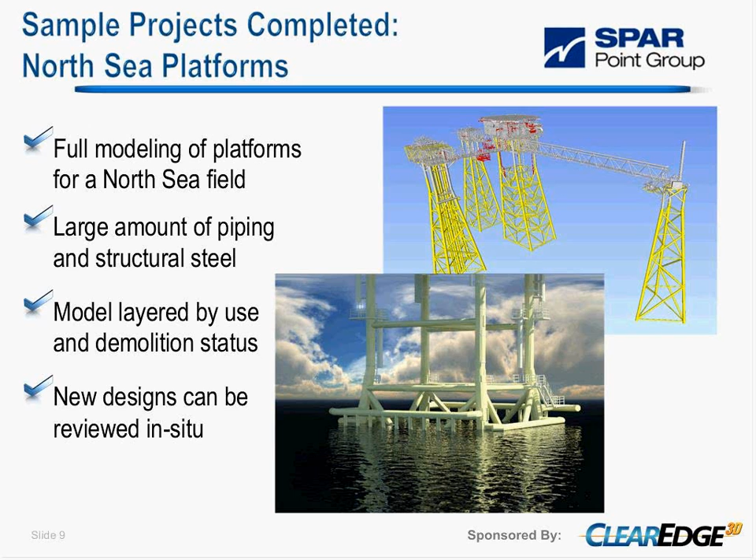The platforms have their own particular operation. They're very congested internal areas, so space is absolutely at a premium, and new piping and equipment must be fitted in right the first time, otherwise the cost gets very high. So with space at a premium, accurate models are essential for these redesign projects.

Modifications as part of the cycle mean that we pass the model around so engineers have accurate data to code on in the project. We do a precise tie-in for the piping engineers to connect new spools and equipment, so they get a fit first time once it gets to site.

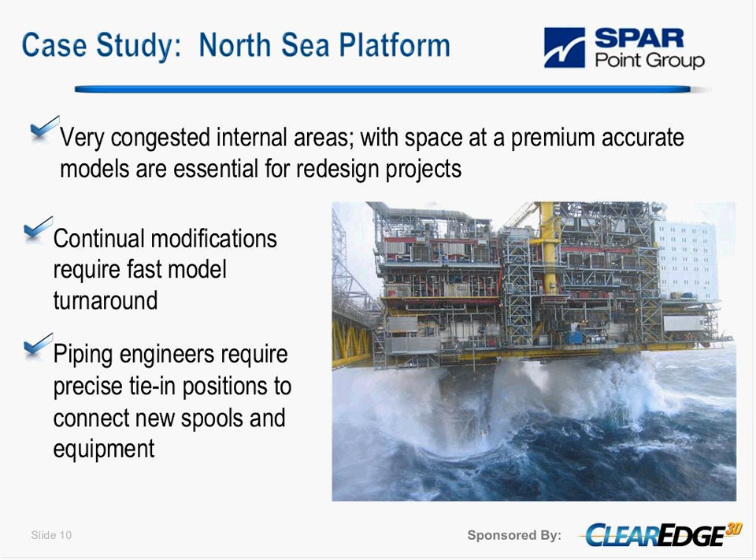Working in these areas for site capture, we found that swivel or spherical targets allow for efficient targeting. In a lot of rooms we have access platforms which need scans taken from them, so flat paper targets don't give sufficient versatility for angling in these conditions.

The surveys we work with typically achieve 60 to 70% target coverage, and then with the LFM register package we complete the target network using bundle adjustment. So bundle adjustment completes the target network, giving us full coverage without needing the full survey, which would add more time than is available in these conditions.

One of the challenges we have is the weather. As you can see in the picture, it can be inclement out in the North Sea. So in the external areas, in a strong prevailing wind, this can actually stop scanning due to the force of the wind on the unit, as the magnetic drives don't have enough torque to turn the scanner in these conditions.

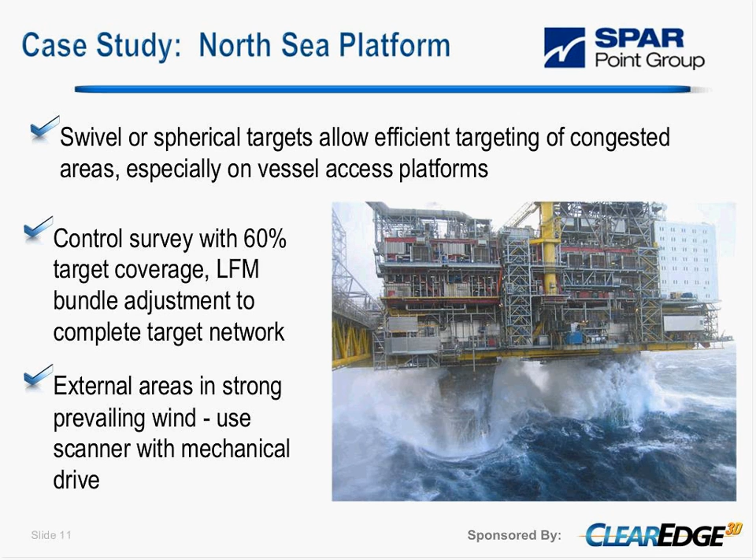The case study I'd like to look at is for the ClearEdge 4 software. A plant room on a North Sea platform required piping to be extracted for a review and then redesign. The piping connection positions - the bolted flange positions and connecting faces - were required for the tie-in to new designs.

Pipe fittings were to be based on the ANSI standard. Modelling this with older methods, using manual pipe extraction and fitting, would take 60 hours; we got this down to just 15 hours using ClearEdge 4 - a 75% reduction.

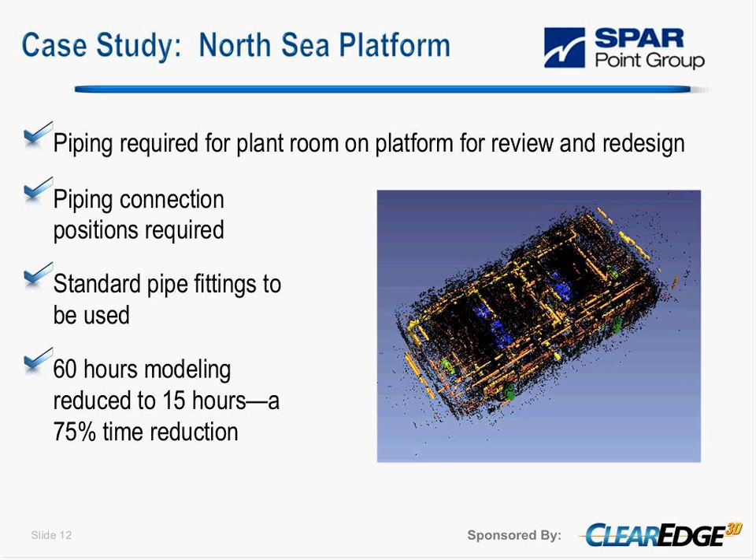To complete the particular area took 20 scans with the 5010. This covered the floor level plus 2 access platforms for upper valves and instruments. You see the image there, the point cloud with the various scan positions - this is out of Edgewise Plant itself, and green indicates each scan position.

Registration took 1.5 hours while offshore, so we complete the registration there. If there are any missed areas, we can rescan on the platform, so we don't have another costly trip out if anything is missed.

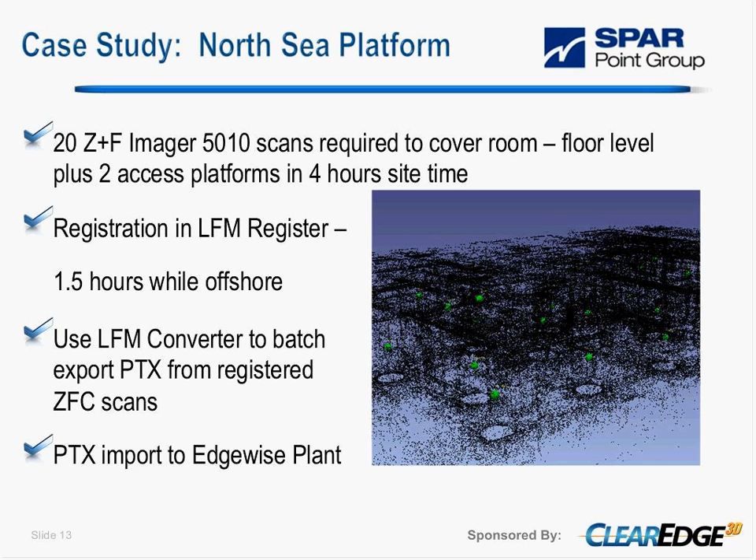After registration was completed, we used LFM Converter to batch export PTX of the registered scans, which could then be brought into Edgewise Plant. We don't have direct ZFC import, so we did have to do this additional step, but as it's a batch process it didn't add significantly to the time for a person working here.

Once the data was brought into Edgewise, the cylinders were extracted within 1 hour. We got approximately 85% of the required cylinders out within that time.

After the extraction, we needed to spend time cleaning, QA, and adding the pipe fittings - standard elbows, flanges, and valves that are now within the software itself, which Kevin will show later on. So that took the first 14 hours.

We then used COE output to AutoCAD, which allowed us to use a solid model import to SmartPlant 3D as a 3D reference. This allowed the engineers to view and snap to existing connection points to continue with their work.

So the image that you see there is the extracted and connected pipes, using the auto-connect feature to join up pipes within the scene.

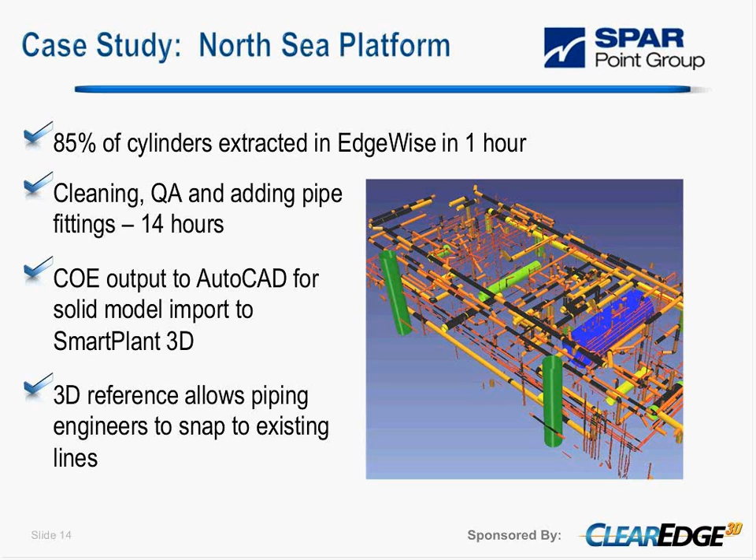We found the automatic cylinder extraction really frees up the user's time for the placement of components and other model detailing. By removing that overhead of bringing out the cylinders, you get more time to do the smart stuff, like positioning components correctly and layering the model.

We can lay this out in ClearEdge itself, so we export to DGN with the piping separated by layer, pre-ordered into different water systems and process systems to turn on and off as required. A SmartSheet with the listing for different pipe diameters allows rapid QA and approval. And see the standardized fitted cylinders using the ASME standard, with several others already in there.

In QA, you've got a very good fit to the point cloud data. Flange detail also allows engineers to take the correct connection position directly out of the model, so with face flanges you have appropriately dimensioned raised face, ring joint, and other flange types.

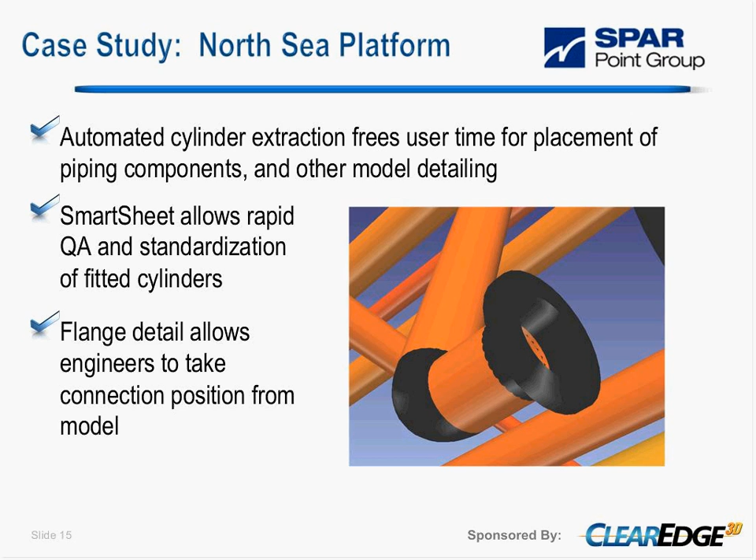A tool that we found very useful was the removal of points around the lines. So we work through the project, and once a line has been made, QA'd, and verified to be as you need it, you can remove those points from the data set, then clean up the scene so you can see exactly what remains and what has to be done.

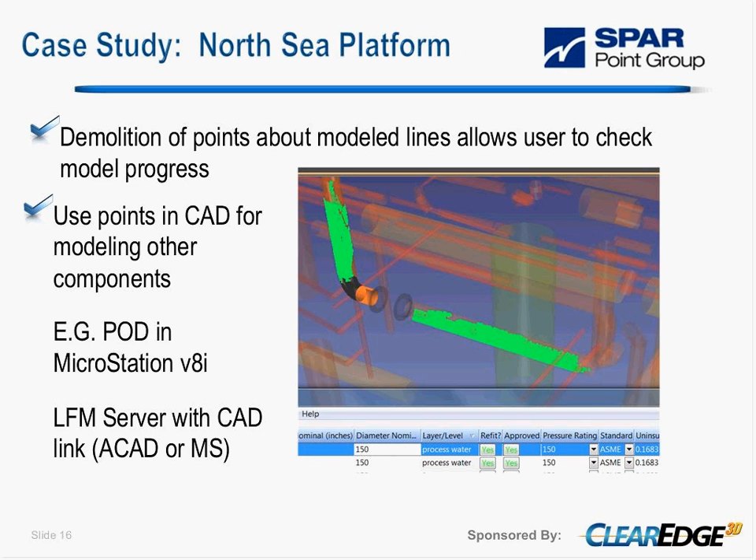Robert, hold on one second, because there are a couple of quick questions that's probably easier to answer now. There's that quick question there: was AutoCAD used to convert the pipes into solid models before you imported into SmartPlant 3D?

The reason we bring it in that way is because you have the layer reference within SmartPlant, so you can turn on and off the separate layers. The reason you go through AutoCAD is that it will display as a solid model. If you bring in a DGN, it displays wireframe only, so it's very unclear.

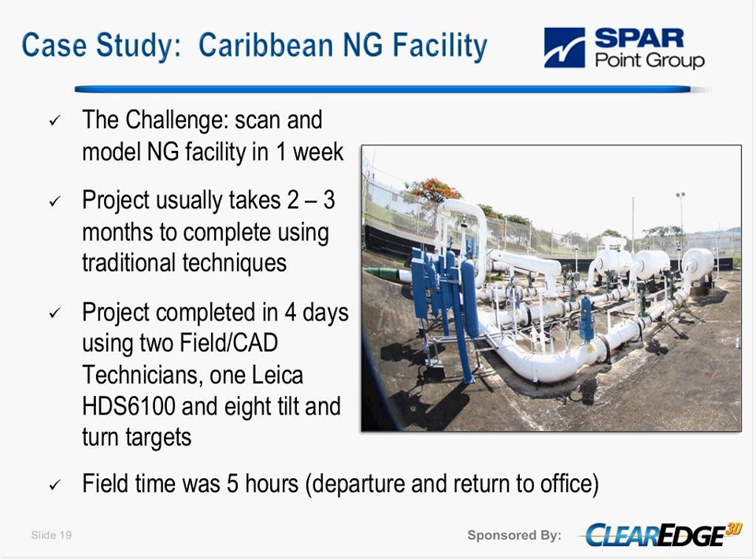The field time was pretty much 5 hours, from the time we left our office to the time we returned to our office that day.

When we got to that site, or any site you're scanning, you need to do a walkthrough to determine exactly where you'd like to position your scan locations. Based on this position, you then stand and place your targets so you can get a field of view of all your targets.

The station took pretty much 26 scans, which included scans outside of the facility because we wanted a topography of the site as well, a site layout.

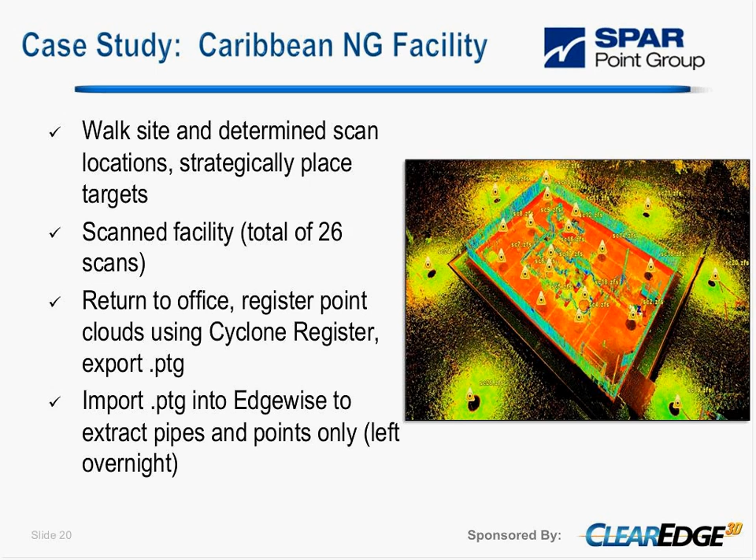After we completed the scanning, we returned to the office where we registered our point data using the Cyclone Register suite, exported the unified point cloud using PTG export, which could be imported directly into Edgewise, where the pipe extraction was done and left overnight to complete.

The next morning we got to the office, and that phase of work was now completed. 95% of all our piping was automatically extracted by the Edgewise plant software.

This really considerably saved us time, because it would have taken another 2 or 3 days of cyclone modeling to obtain that same data in terms of the cylinders. We completed the extraction process, feeding that data directly into Cyclone, where we build our elbows, flanges, valves, and fittings.

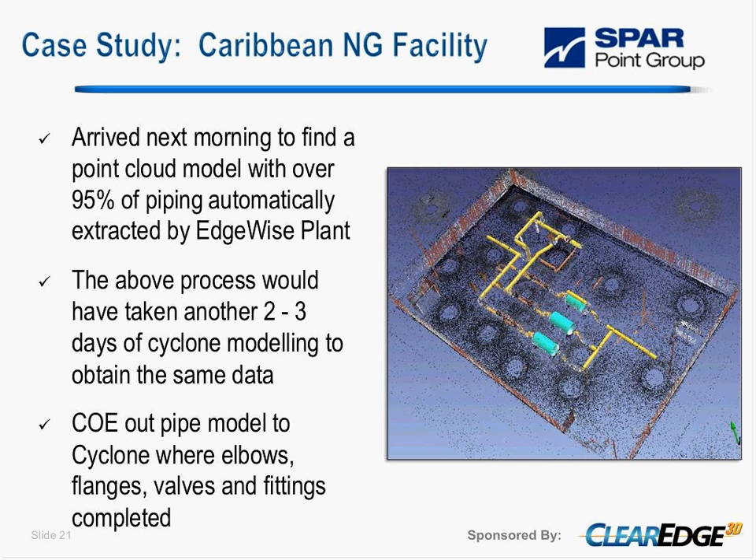This was using version 3.2. If we were using version 4.0, this would have saved even more time, because we could have completed all our elbows, flanges, and fittings directly in the Edgewise product, without even having to go into the Cyclone product for modeling.

After going into Cyclone and completing those fittings, the next step was to export a COE of that model into AutoCAD, where CADWorks is also running on that same platform, using the center lines of those models to develop our CADWorks intelligent view. The facility took less than 3 days.

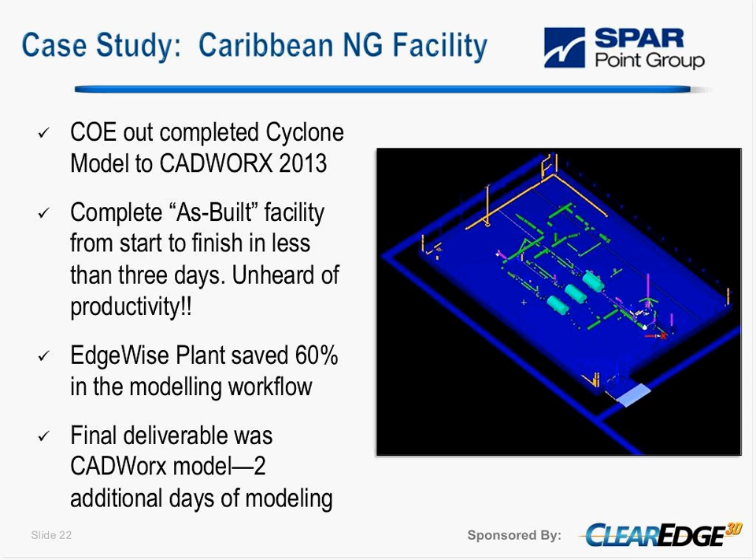In terms of productivity in our country, EdgeWise Plant really saved us a lot of time, over 60% in the modeling workflow, with just 2 additional days doing the CAD modeling to complete that model.

Now a bit on the challenges we usually face when modeling these facilities, and some tips and techniques for these problems. One major issue is trying to target your facility without over-targeting it.

You might also end up with heavily congested piping, especially small bore piping. How do you position your scanner to get data without too many occluded points? Also, some facilities, especially gas facilities, have a lot of Denso tape on the flanges, which is a problem especially when doing dimensional control.

The lagging on some plants is really bad, not put on properly, which creates challenges for us. Also, twisted piping is definitely a bad thing to deal with.

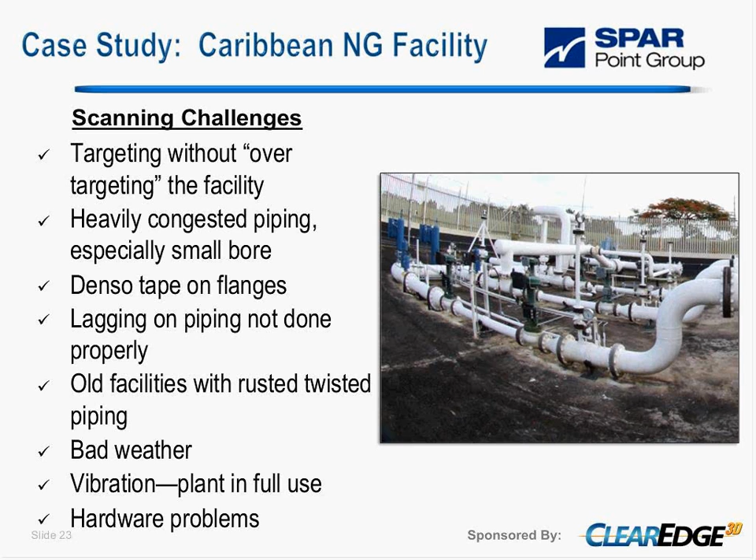These plants are all outdoors and not covered, so weather plays a big part. When it rains, and it rains a lot here in the Caribbean, in Trinidad, that holds us back. Vibration is also a problem, especially on offshore platforms with grating and structure, where the scan sometimes shuts down because of high vibration. And then there's the scanner itself acting up and holding you back from a job.

One way we try to combat some of these problems is by using tilt and turn targets, as mentioned in the previous slide. They give you a really good point of view. Using a few of them, you can see them from many different locations, as opposed to flat targets, which are restricted in how they can be seen.

Generally in the field, I always tell people: the more data you can get in terms of acquisition, the less time you're going to spend, because you'll have enough data to utilize for your model. There's a benefit here in the sense that with EdgeWise, you need that much data to be able to extract your pipe, so this can be a strong point. Without EdgeWise, you definitely want to get as much data as possible so you can model things correctly.

Experience plays a big part in determining where to set up your scan locations, mainly to see the plant properly. When looking at a location, you're using two points of reference: your eyes, and the center of the laser, so you're not seeing exactly what the laser scanner sees. After doing a number of scans, you get a feel for what you can and cannot pick up with the laser scanner. This determines how many locations you need and where to position your scanner to get as much data as possible.

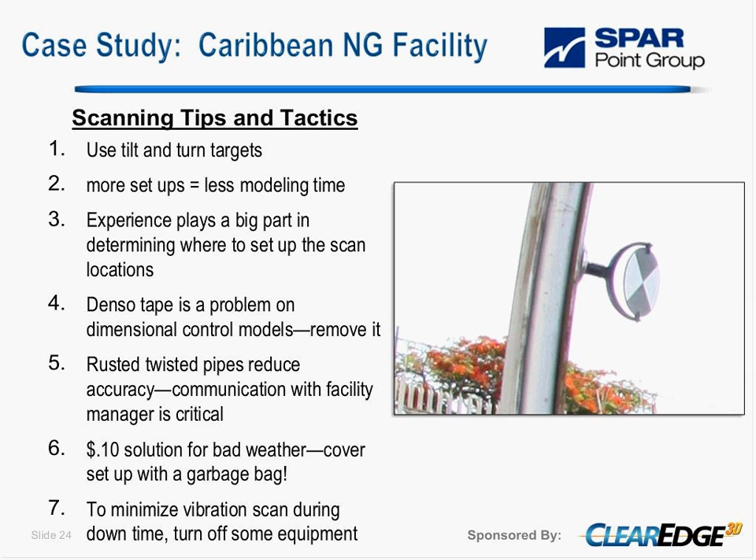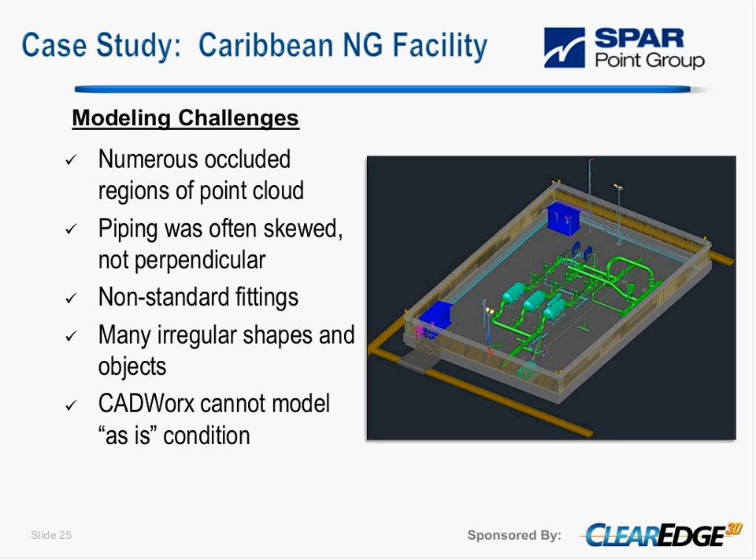The extraction and auto-complete algorithm is generally used from where you don't have enough points. The software doesn't require that many points to be able to generate a cylinder, especially in those tight locations where you might not be able to get all of the piping that you think you require.

So understand what the plant is requiring. If it's not dimensional control, then we don't have to worry too much about the exact location of every single fitting in that plant. From the get-go, it's just a 3D model for our materials or for the guys in the field to work with, and that's not such a big issue.

So we can deal with taped connections, rough-fit piping, bent piping, and all of that stuff. The thing about EdgeWise Plant is you can put in a lot of non-standard fittings there, which greatly improves and enhances your productivity time compared to the older plant.

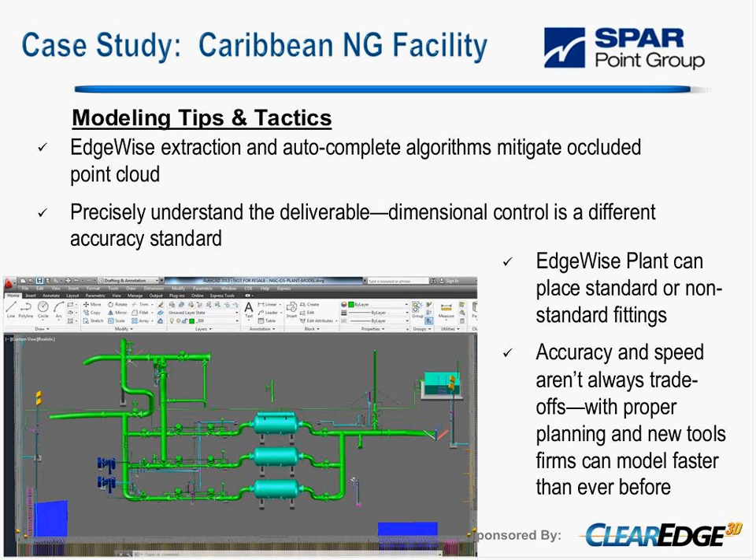Because these new tools now model much faster, we don't have to sacrifice accuracy for speed - it's so much better and much quicker. It reduces a lot in terms of getting to a deliverable much quicker for the plant, and much more accurate as well. So with that, I'll hand you over to Kevin.

What is Denso tape? It's a very sticky tape that is used on those flanges. Some people use it when putting it in - if you have very small leaks, it prevents that from escaping into the atmosphere. It's a sticky, difficult tape to work with.

And the other question I think would be good is, you talked about the amount of time you needed for the scanning - I think it was 4 hours in the field, was it? What quality or resolution were you scanning at to get that time?

We have high resolution. A scan typically takes us 3 minutes on that high resolution to look at.

Okay, excellent. All right, why don't you take it away, Kevin, because I think a lot of the technical questions are going to be answered by you. Thanks, Sam.

The first couple of versions of Edgewise Plant were great time-saving tools. They did really well, automatically extracting pipes and elbows, but they were fairly limited in scope of what they could model. So 4.0 is a full end-to-end solution for creating pipe models. In this version, we filled really all the remaining gaps in the workflow process, and we think we did it with very fast, efficient and accurate tools that ought to make pipe modeling a whole lot more pleasant going forward. It should be a lot more cost efficient than with some of the older technology.

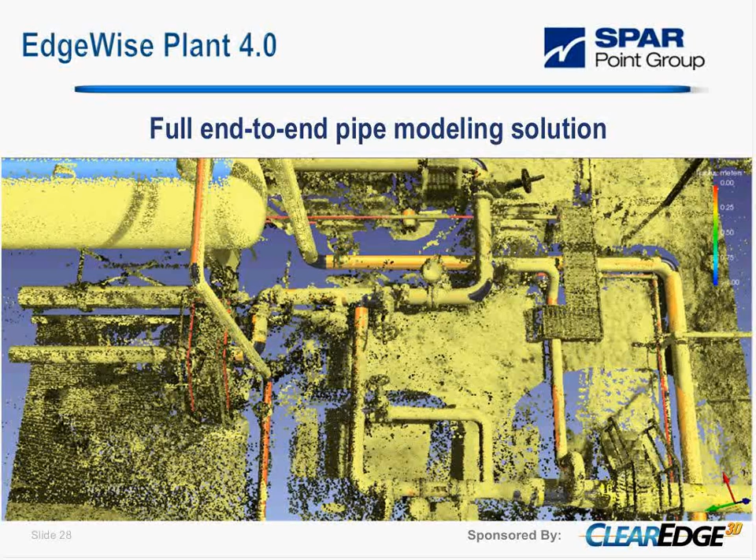This next slide shows some of the major new features that we added to Edgewise Plant 4.0.

The first and most obvious thing is we rewrote our old point cloud visualization engine. If you had used an older version, it was really meant to just process through a bunch of data and create pipes automatically. But with these new tools, we really needed a good quality point cloud visualization engine. So the current version, we've tested it with up to 10 billion points. That's just the largest data set we have, but in theory its only limitation is the size of your hard drive, and it works really quite well.

We've substantially improved the automated piping, so it pulls even more pipe than older versions. We have really cool new QA tools, and we think we've got the QA process about as good as possible now. You can QA 1,000 pipes in an hour if you know what to look for. It's a really quick and very thorough way to make sure all your pipes are perfect.

We've got driven valves, flanges, reducers, eccentric, concentric. We've built out a set of specs, and all the components are based on those specs, and that's fully editable. So if you're working with the spec, you can clearly build your own spec and use that to create components. We have a demolition tool, which a lot of people have expressed a lot of interest in and requested. What it essentially does is find all the points associated with a pipe run and remove them from the point cloud, so it's as if the pipe never existed.

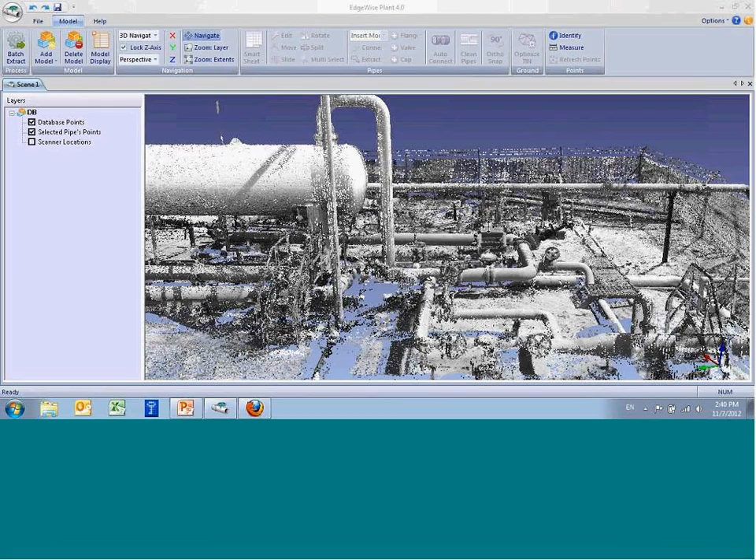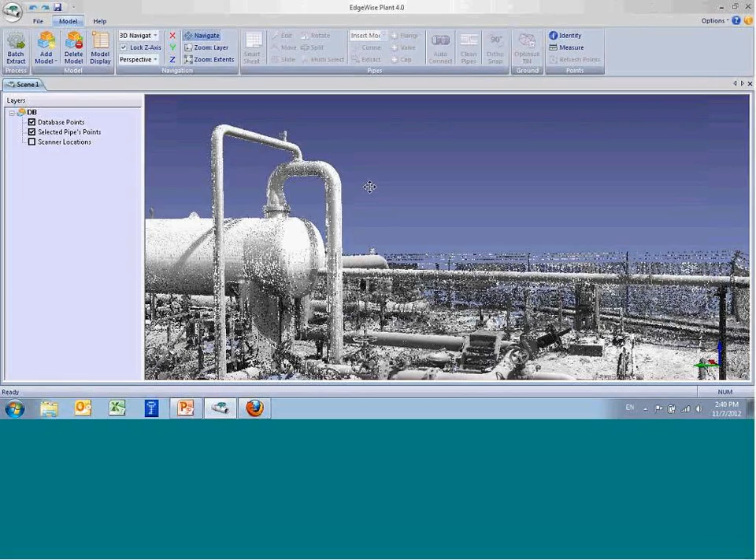So you should be looking at a pipe plant here. This is actually a SPAR point cloud, but one appropriate since the valves, flanges and everything else can't be displayed publicly - the data sets we have are confidential. This will certainly do.

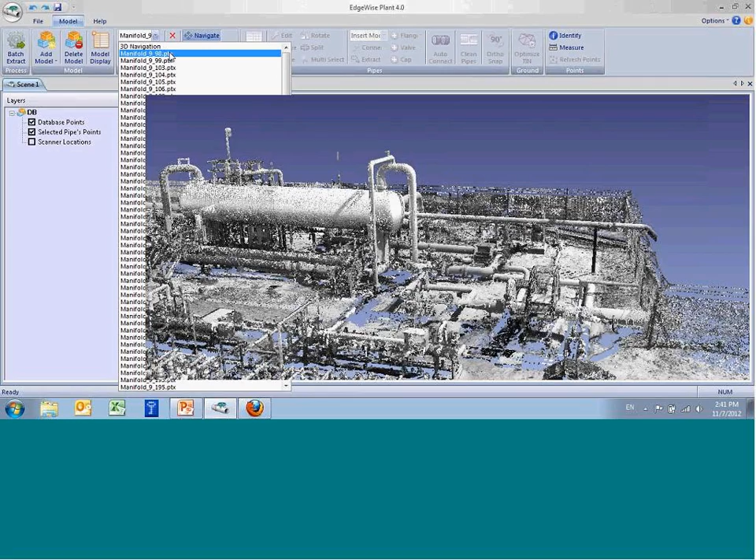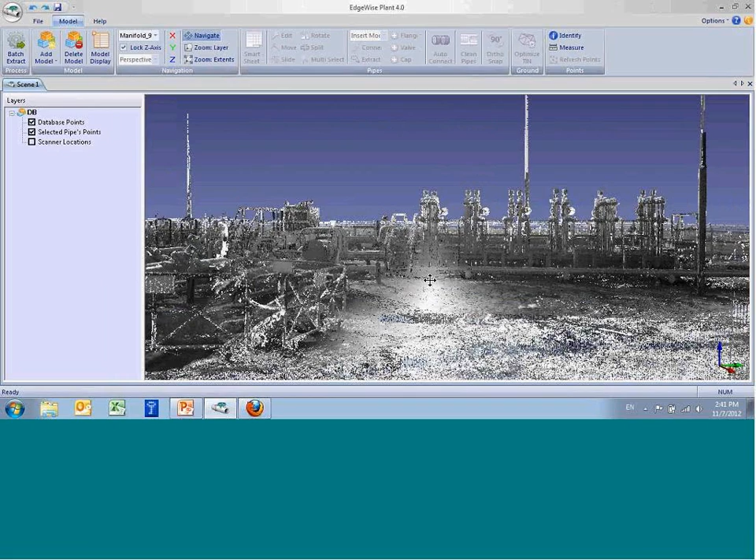Let me show you a couple of the neater features of the point cloud visualization engine. You can jump to any of the scans and get the data from the position that scan was taken. You can see we just jumped to a scan, and it looks like a picture - this is called bubble view in some other applications out there. Jump to another one, and navigate your whole scene this way if you'd like, or go to 3D.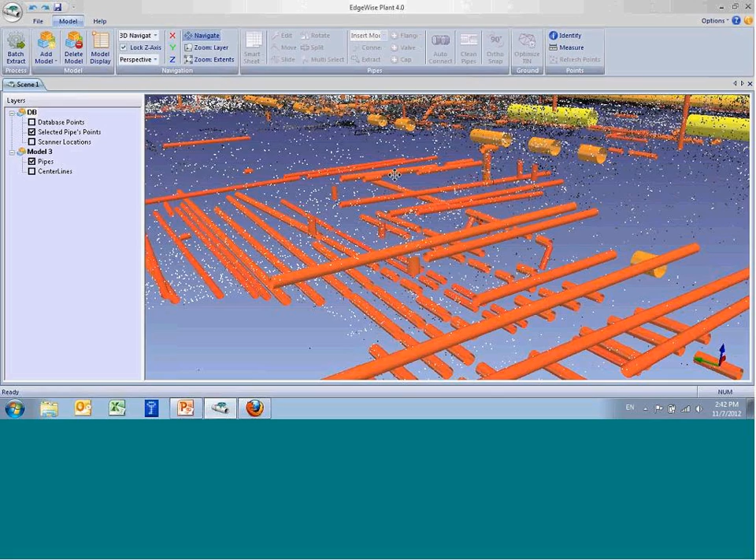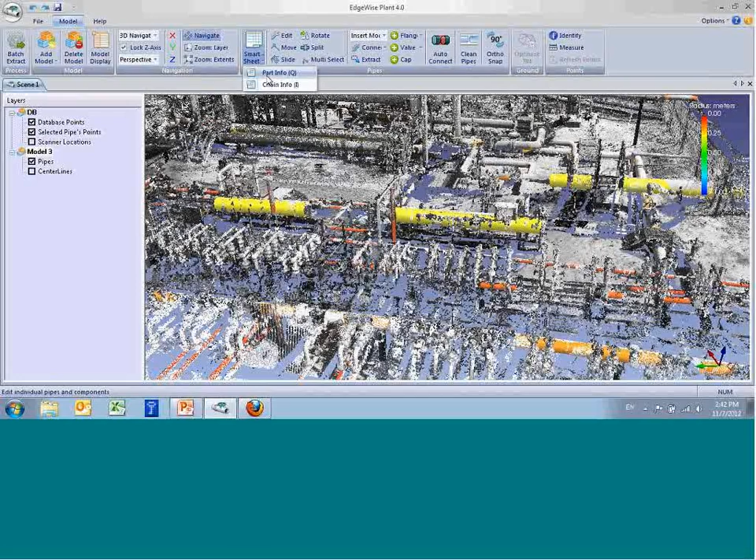One of the things we found we still wanted to improve from the last software was the QA process. So we've got some really slick tools for going through and QA'ing a single pipe now. I'm going to open up the Smart Sheet, look at the individual parts, and go here and turn on inspection mode.

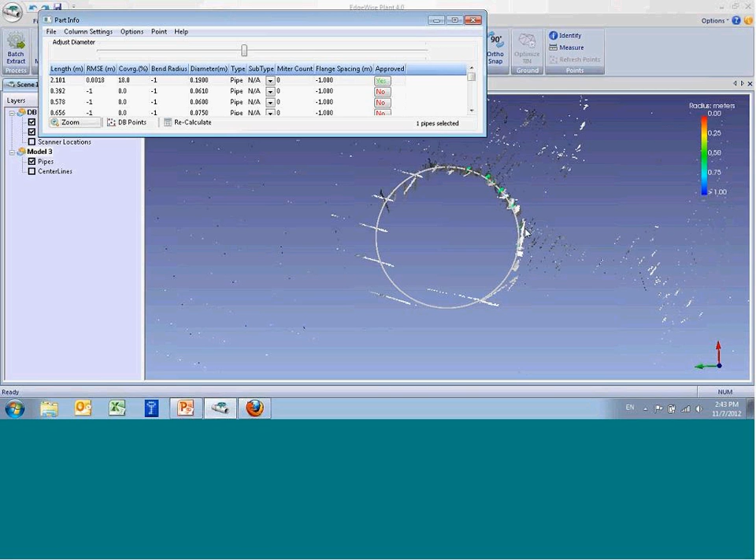All right, and if I click on one of these - essentially what the Smart Sheet gives, if you haven't seen it before, is all the information for each of these pipes. If I click on it, it jumps me in the view, when I'm in inspection mode, to looking straight down the barrel of that pipe. So you can see the outer circle of that, and all the points used to fit that pipe. In the next one, you can see very clearly the quality of the fit of each of these pipes.

And you can even start arrowing down through them to get to one like this, where you can see that fit was a little bit too big. You can see that the real circle ought to be here. So there's a handy little slide bar over here that you adjust on the fly, and it refits to the point cloud.

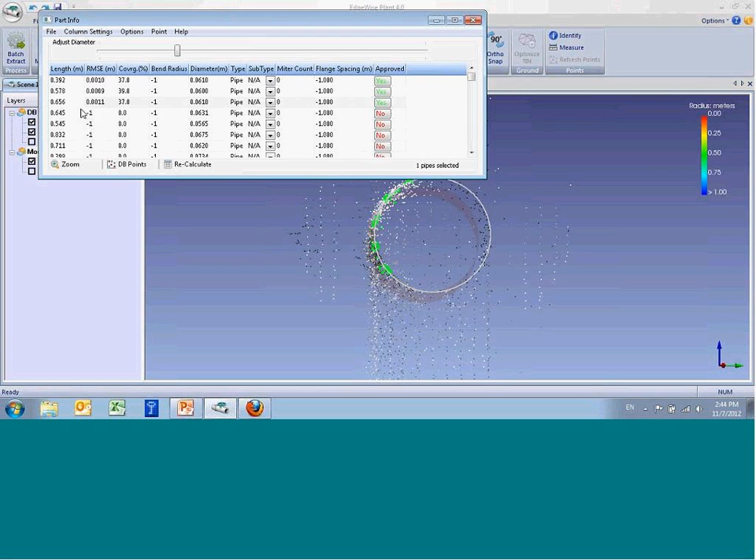Once you're done looking at each of these pipes, you go to the next one. If I open up the spreadsheet, we've got an approved column over here, and every pipe that I've clicked on has checked on to yes. Now, if I don't approve of one of these, I can toggle it back to no. It's a thorough way to make sure a person has looked at every single pipe and validated it, and made sure it was a good fit to the data.

So you can really quickly, with the arrow keys on your keyboard, go through a lot of automatically extracted pipes in a very short time and make sure your data is perfect before moving on.

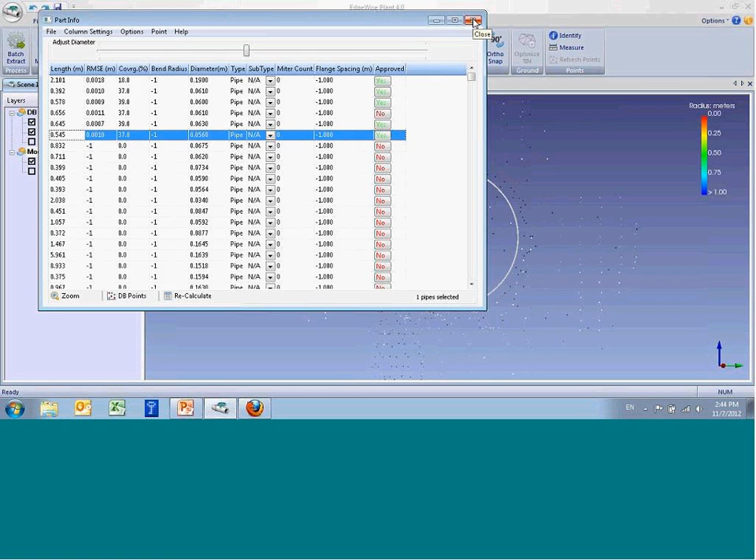Back to here, and if we find an area, have an interesting area here.

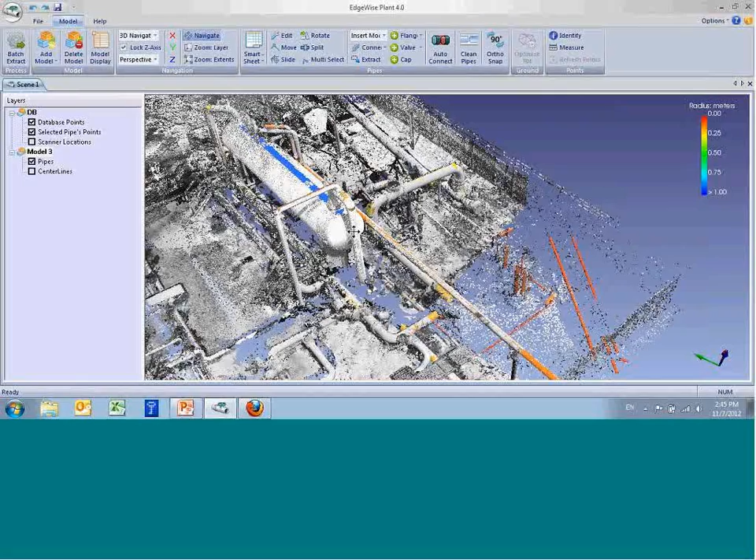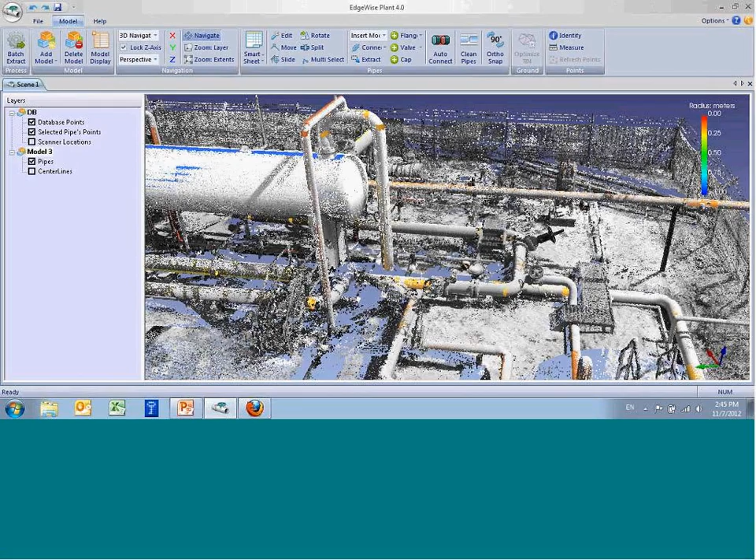All right, so the flow now is to go through and make sure all of the automatically extracted pipes are correct, and then EdgeWise, as these guys talked about, doesn't find all of the pipes, particularly in sparser data sets. So it has missed some of the pipe components here, there's a missing portion of this pipe here.

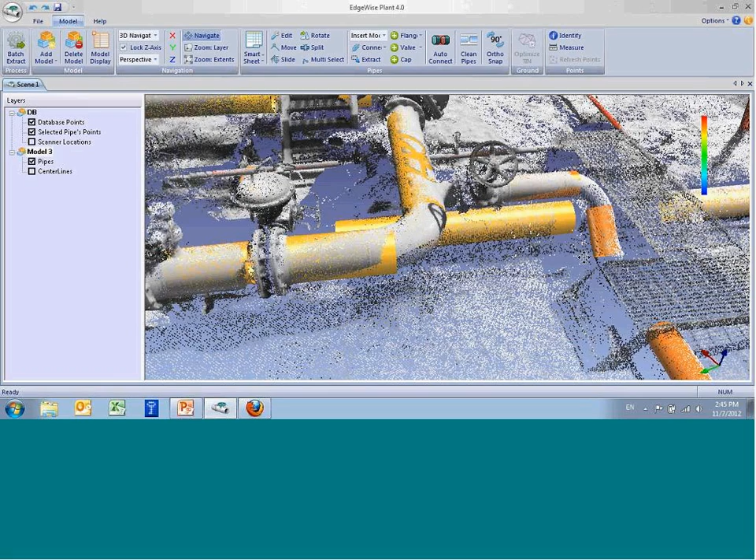So there are real quick and easy manual tools to go through, and you don't have to do any prior cleanup of the point cloud data. Just select a pipe and outline around it, and these new manual extraction tools are a whole lot better. The old ones would solve correctly maybe 70% of the time. Now it solves almost always correctly.

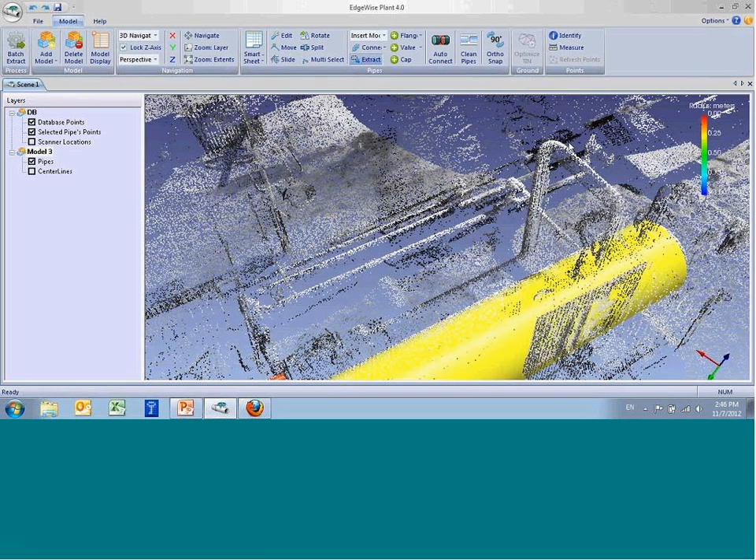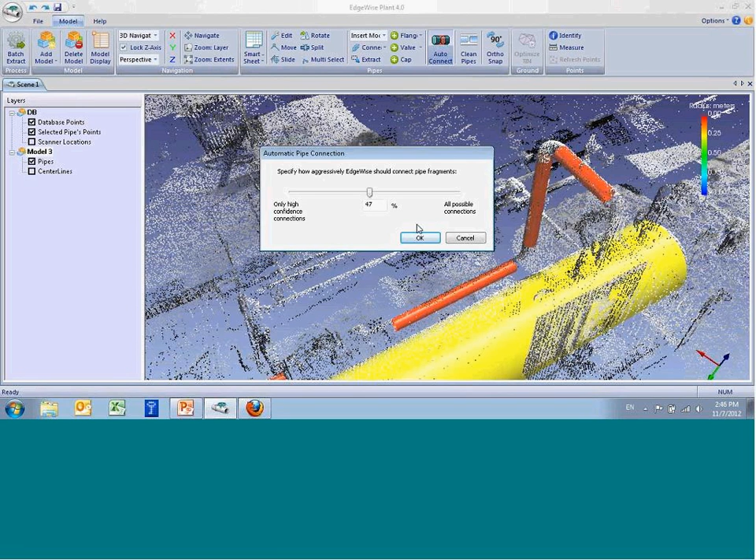So you can really go through and pull chunks of pipe. When you're extracting missed pipes, the auto connect algorithm makes all the logical connections in the piping network.

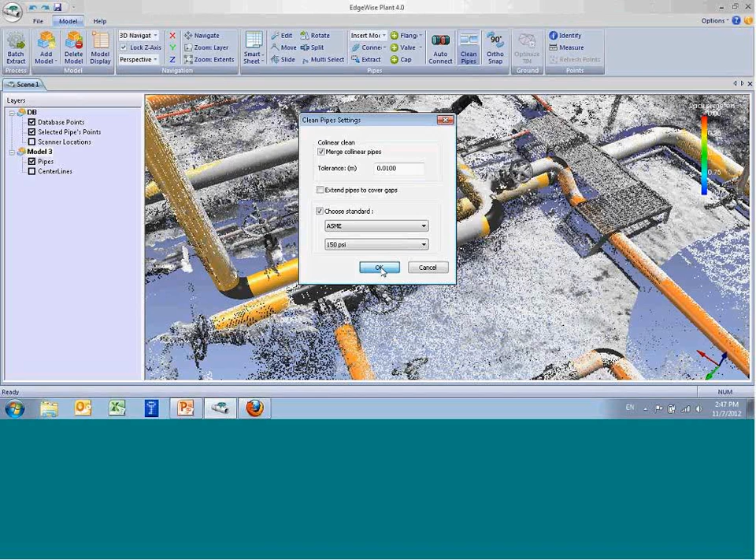And then we can clean the pipes and standardize them. So in EdgeWise 4.0, we've got a list of different standards. We now have DIN and British standards, and you can choose the pressure rating within that standard. So I'm going to have all of my pipes default to 150 psi, and standardize all of the pipe diameters.

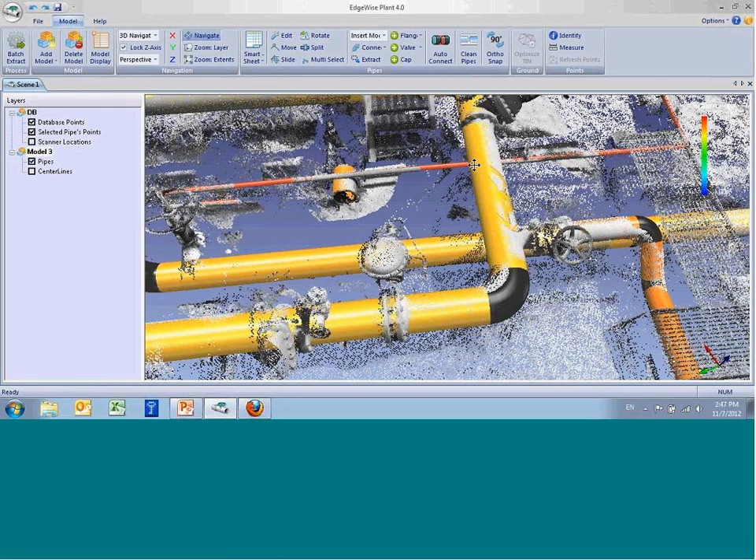Standardized, we can go through and start adding components. So each, a bunch of valves here attached to these pipes. Let's drop in a valve. We have a host of different valves that you can choose from. These look like flanged gate valves. So you see one here, you see one here.

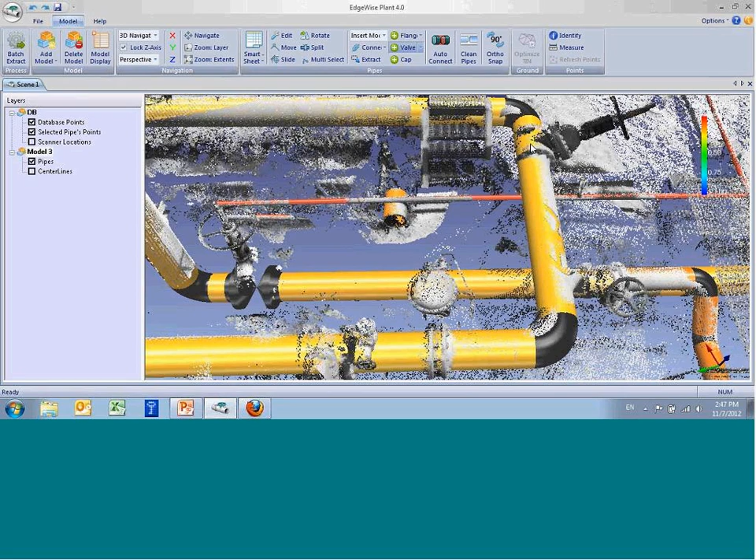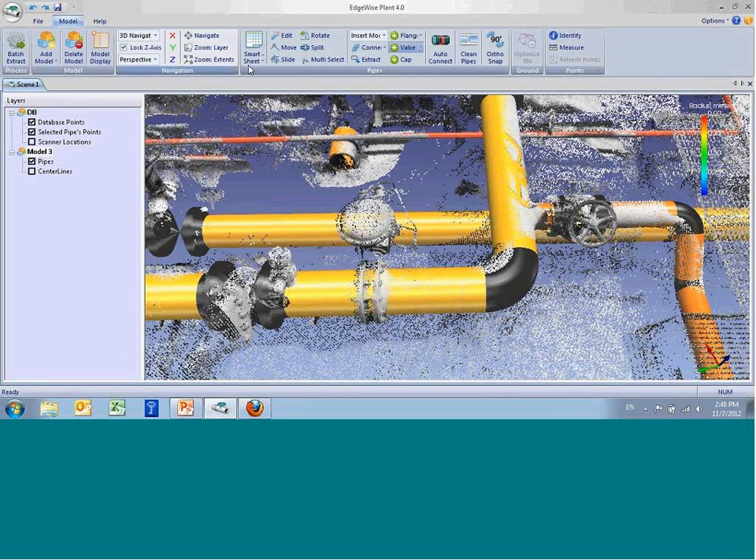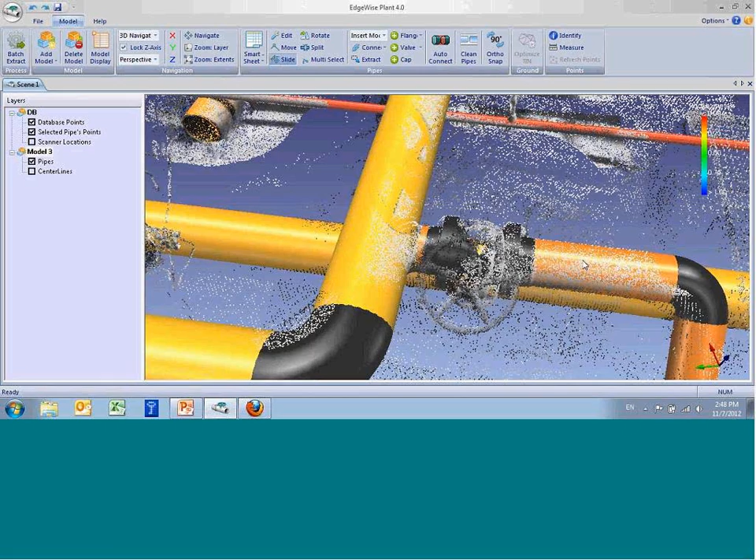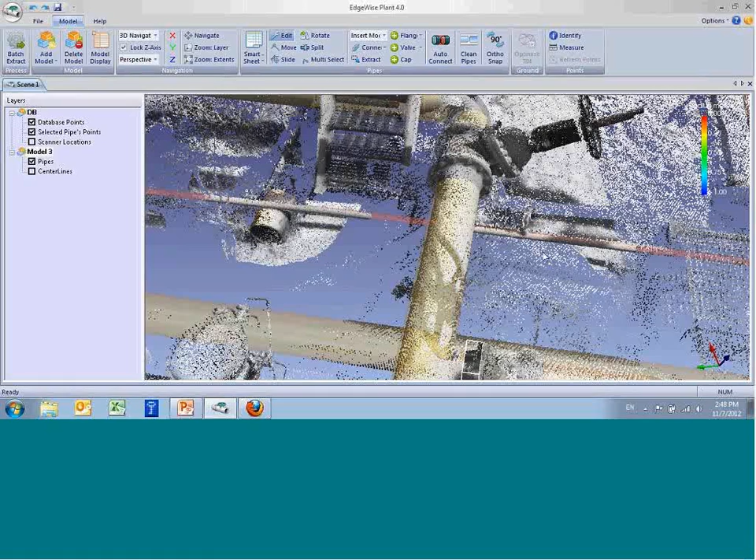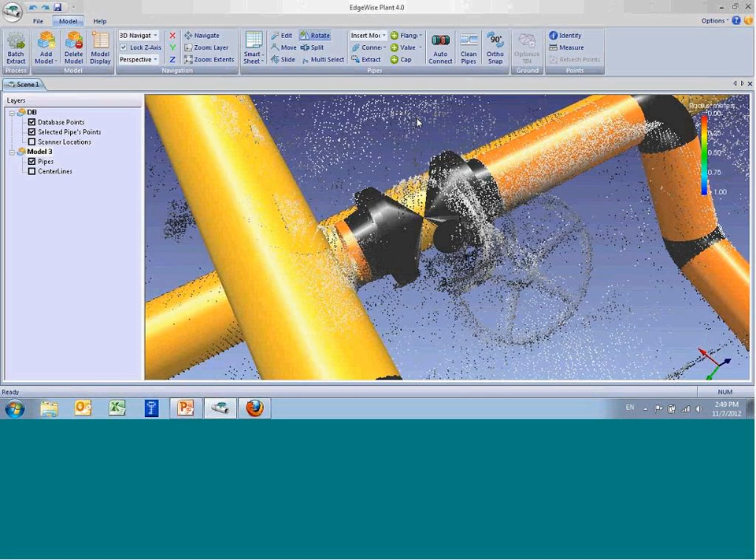In real close, you can see that this object here is comprised of the middle, and it automatically gives you the flanges on either side as well. You can delete those, they're individual pieces. You can also go through, and there is a hand wheel currently representing it too shortly, but we can rotate this hand wheel in here. Rotate a little bit, and you can see the hand wheel matches the actual hand wheel of the valve itself.

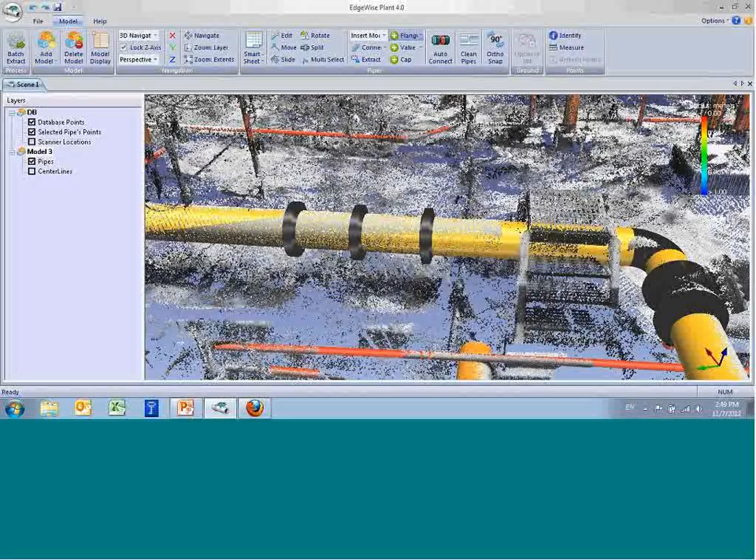The same type of thing works with flanges. So let me go through, and I don't know if I have actual flanges around here, but I can show you real quickly how they work. Let's choose a slip-on flange. Again, these are properly dimensioned flanges with raised faces, and they come in pairs. If you only want to model a single one, you can delete one of those, but most of the time you're inserting pairs.

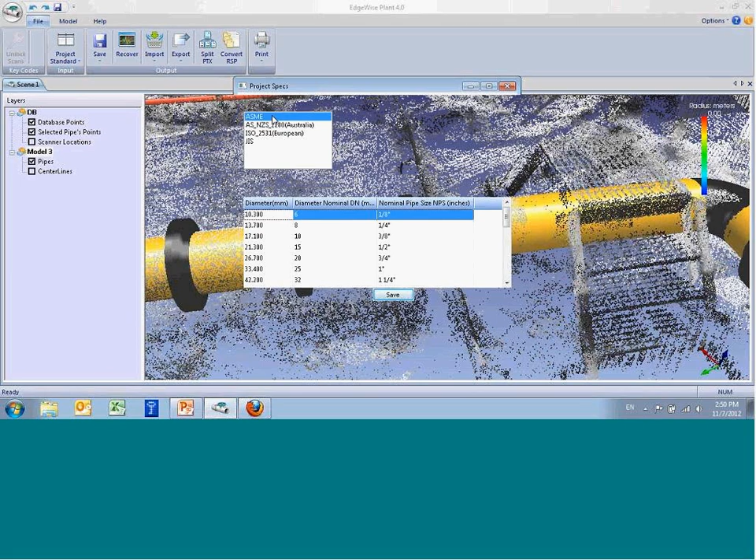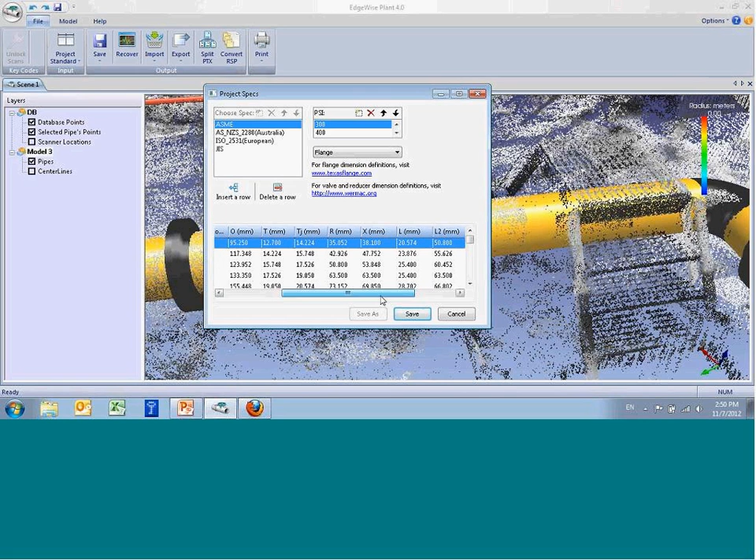Now, where the dimensions come from is we have a library, so on ASME, here we've got the different sizes, the nominal sizes of pipes that are allowed. You can look at flanges, and for each of the different pressure ratings you can see the different specs that define how that flange is rated. So everything is entirely spec-based. You can create your own specs and import your own specs.

It's a very flexible system, and it keeps everything lined up and creating the correct parts.

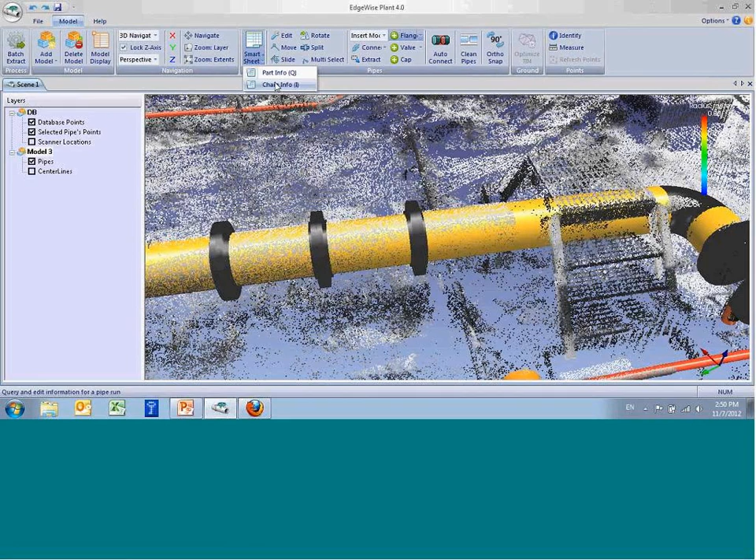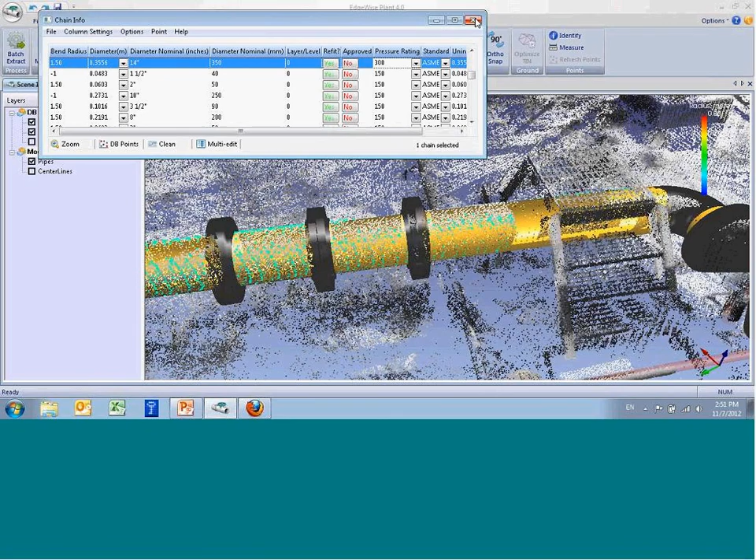Now, one other thing, let's go back to smart sheet for this pipe. I'm going to click on the chain. See, it was defaulted to 150 psi. Now we changed that on the fly, and watch the components as I do so. I'm going to change it to 300 psi. You can see that the components all resized and got beefier because they have to match up with the 300 psi spec. So it's extremely dynamic, all entirely spec driven.

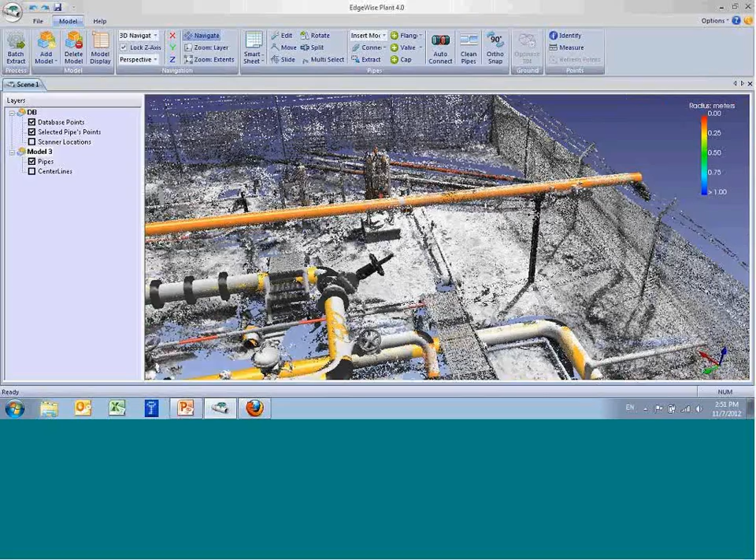My thing keeps hiding my controls. All right, one last thing. I talked about the demolition tool. I just want to show that to you real quick.

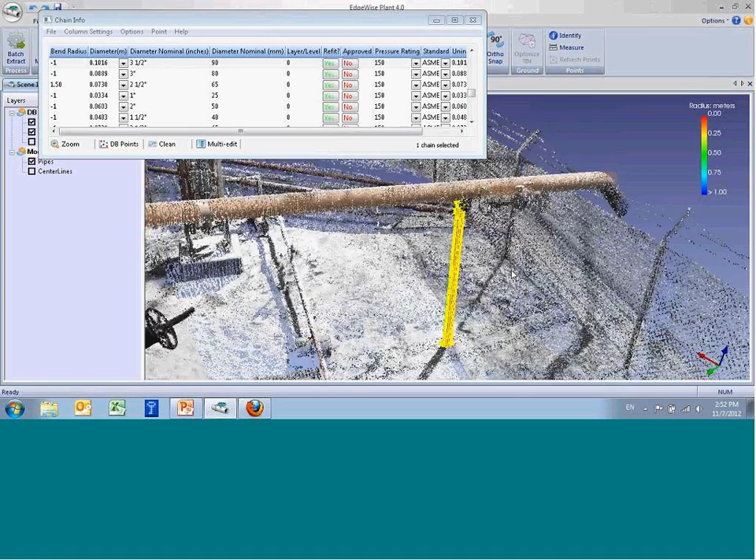I select a pipe. This takes a little bit of time on longer pipes. What we can do is show all of the points that are associated with that pipe. So it went out and grabbed all the points, and you control a radius around that. If there were any components on there, we would grab all the components as well. So you get a point collection of everything associated with that pipe. You can go and delete those points.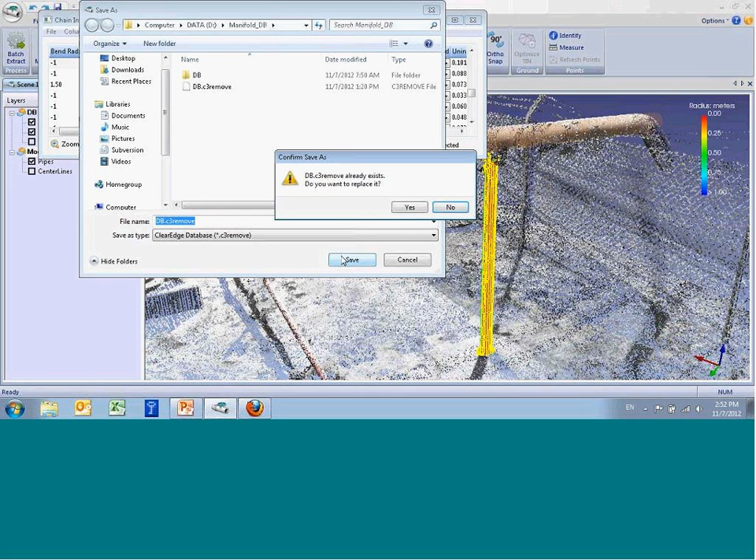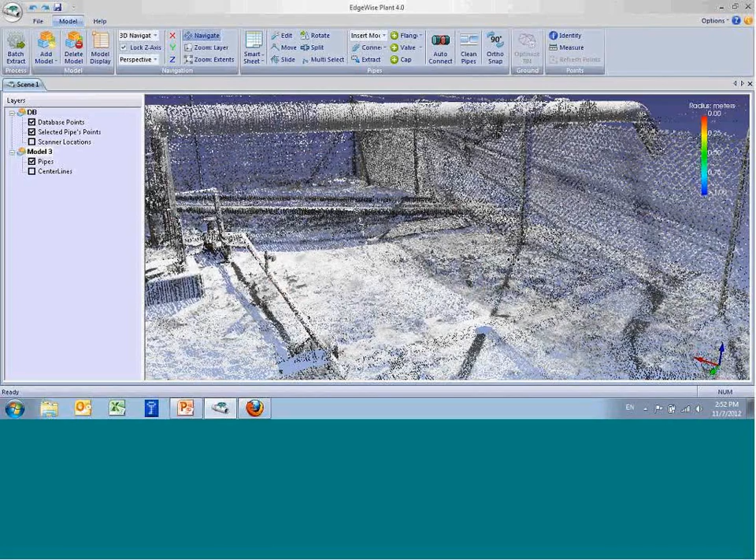And this will go through and completely remove them from the database. So if I navigate now, you can see that when refreshed, there's no pipe in the point cloud at all, as if it never existed. So it's completely removed from the point cloud.

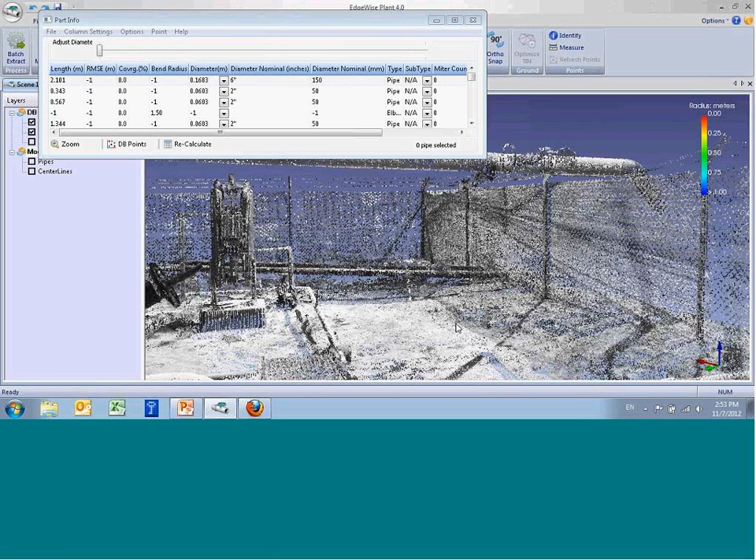We can add it back in if that's a mistake. That's real easy to do. We can restore those points and choose the file that I just created. And here's our result.

So once you've finished creating the model with these tools, you can export to MicroStation, AutoCAD, or Cyclone. It probably won't be in the initial release, but we're working on integration with PDMS as well.

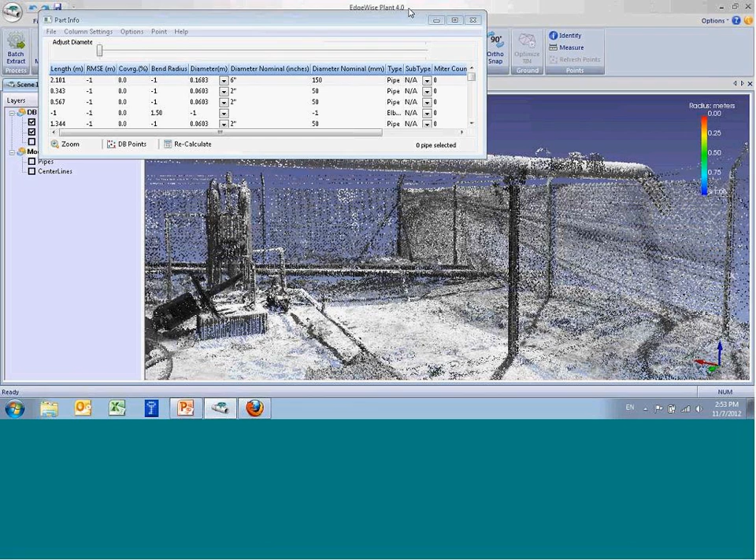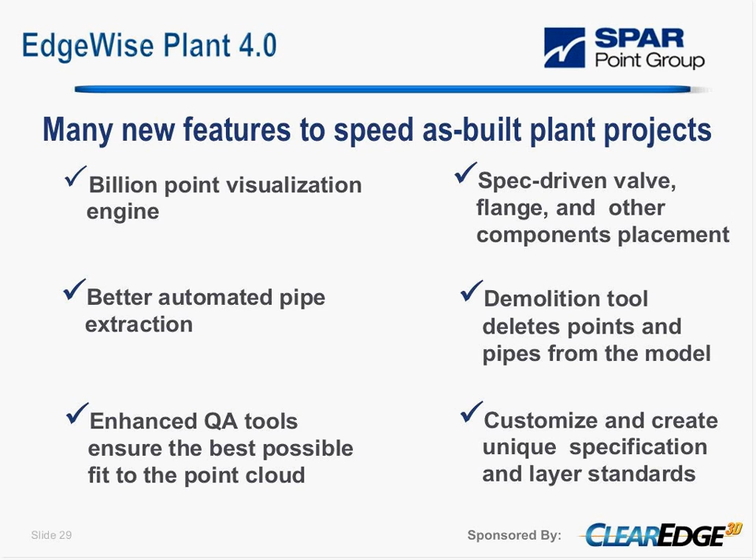So that's the demo. Let me hand it back to... There we go. All right. It should be back to the slide deck. And I'll get the power back here. All right, beautiful. Okay, here we go. Nice work there.

We're in our final row here, and I want to make sure we get some questions answered because there are quite a lot of them. That's often asked, Kevin, and I want to get some feedback from Robert and Resh as well: how small of a pipe can you extract?

I'll take first stab at that, and I'll let the other guys share their experience if they want. It's completely a factor of the quality of the data, the density of the data, and the noise in the data, as well as the noise of the pipe itself. If you have smooth pipe and perfect data, you can get quite small. For practical purposes, the software does a pretty good job down to 1 inch. You can manually extract things down to 3/4 of an actual inch fairly reliably—not nominal 3/4 inch, but an actual 3/4 inch.

Robert, what's your experience? You're out there in the field—were you attempting to get small pipes, and were you successful? Within what I showed you, there's quite a lot of fire water, which is typically very small bore, 1 inch bore, so maybe 30 mil outer diameter. We were getting those out, but again it's based on the range of the pipes from the scanner. Like Richard said, we use the high resolution, the 3-minute 22-second scan. But yeah, we did have quite a lot of that taken out automatically.